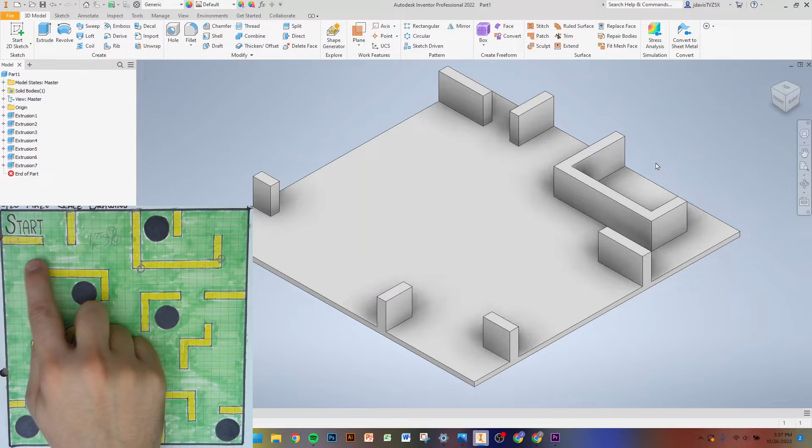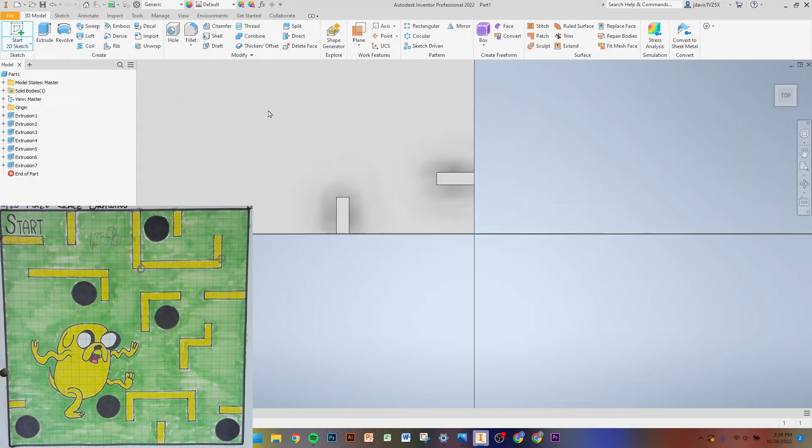Now to get these interior walls, we are not going to be snapping to anything at first. We are just going to estimate where this first box is going to go. So I know that I need to draw a rectangle that is, again, a 1/4 inch thick by 1, 2, 3, 4, 5, 6, 7, 8, 9, 10 quarters of an inch long. So I'm going to start a 2D sketch. We are going to click in our maze just like we've been doing. I'm going to go 10 quarters of an inch, which is 2.5 inches long by 0.25 inches wide.

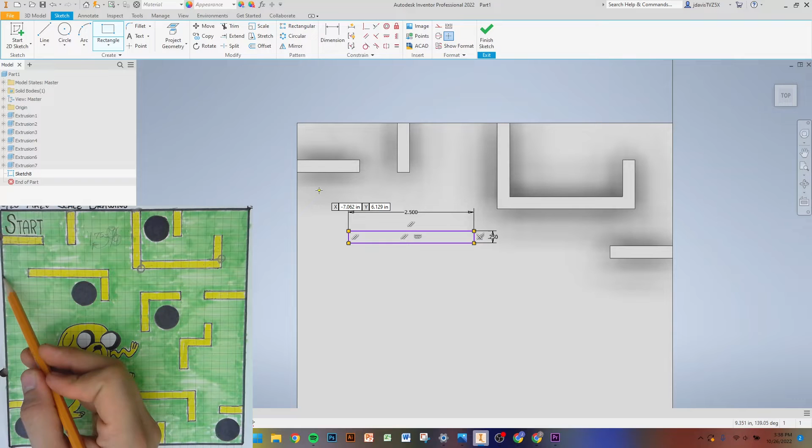Now what we need to do is position this both vertically and horizontally. Let's do this horizontal first. I can see that the edge of this wall is 1, 2, 3 quarters away from the edge of my maze. So I'm going to go dimension. I'm going to click the left side of that wall and the side of my maze. And because this is 1, 2, 3 boxes away, we know that this is 3/4 of an inch away. Now this is almost there. We know that it is in the correct spot horizontally.

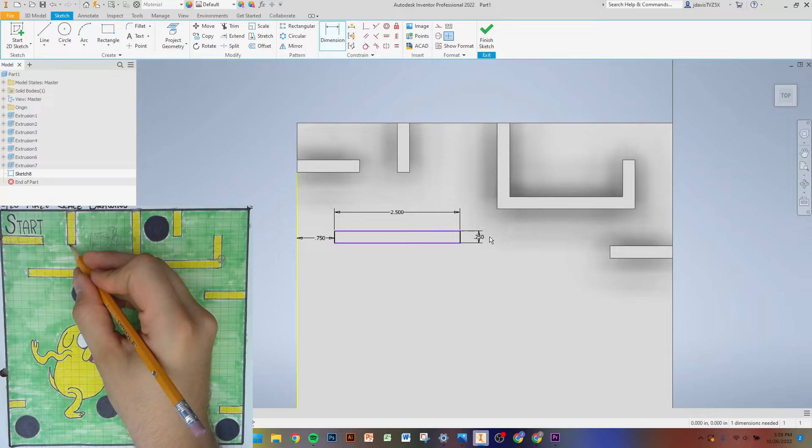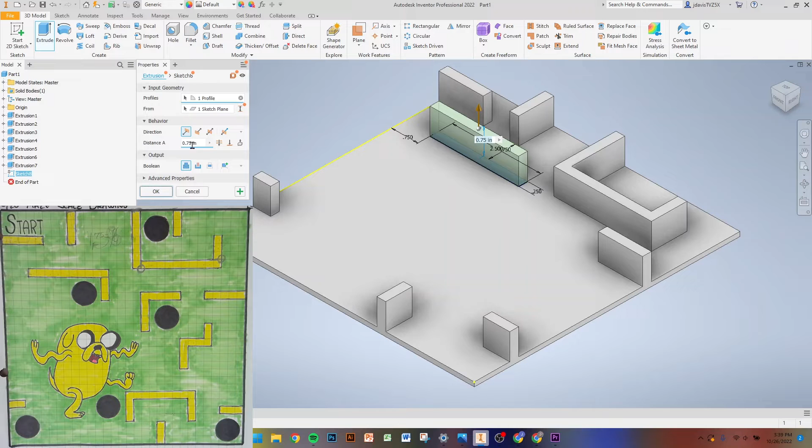Let's figure it out vertically. I'm just going to grab the closest point so I can go from right here 1, 2, 3 boxes away from the bottom of this wall. So I can dimension from this point up to this point, and again moving my mouse down to get that dimension to pop up, and this is going to be 3/4 of an inch. At this point I can just hit finish sketch, extrude, 0.75 for our height as always, and then hit OK.

The next wall, I'm going to get this little piece here, and I want to snap my rectangle to this point over here. So I'm going to go 1, 2, 3 boxes down from there. So let's start our maze. Rectangle from the corner, again wait for that to turn green, and we are going to go 0.25 thick by 0.75 inches long. Finish sketch, extrude, and that is good there.

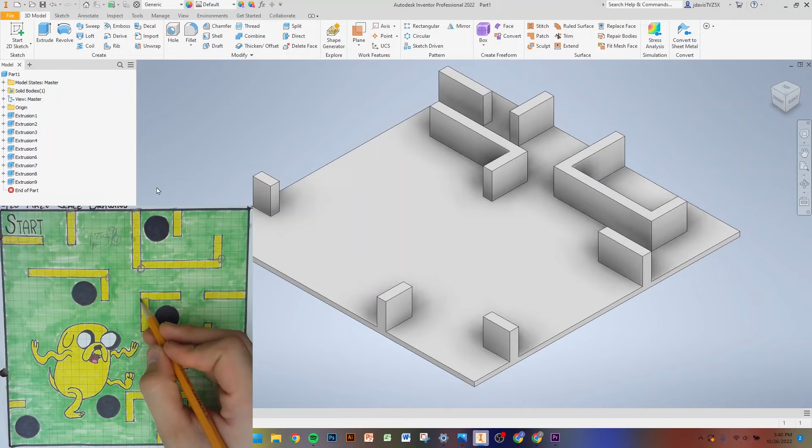Let's do one more. Let's do this one right here. Okay, again I'm just going to estimate drawing this first box here. I know that it's 1, 2, 3, 4, 5 quarters of an inch, or 1.25. So let's start a sketch. Let's draw it close to where it is, 1.25, and our thickness is 0.25.

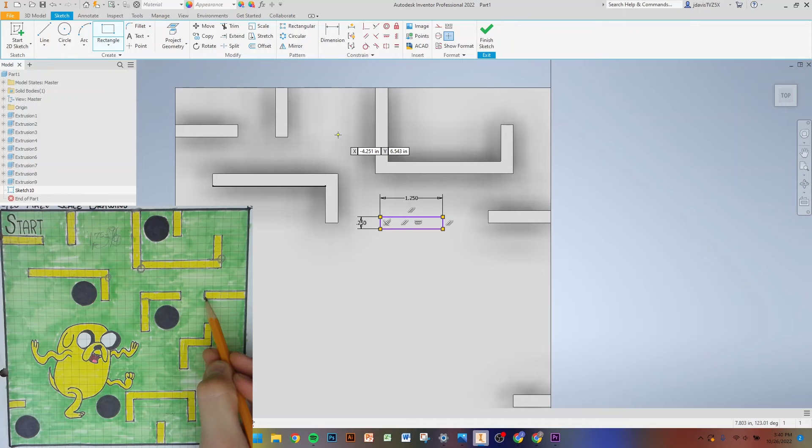Now I can see that it's really close to here, so let's get this distance. From this side of the wall to this wall is 1, 2, 3 boxes. So let's dimension from this side to this side, 0.75. And then let's dimension from here up to here. Again, that is another 0.75. So we can go here to here, 0.75. Let's finish this sketch, extrude, and OK.

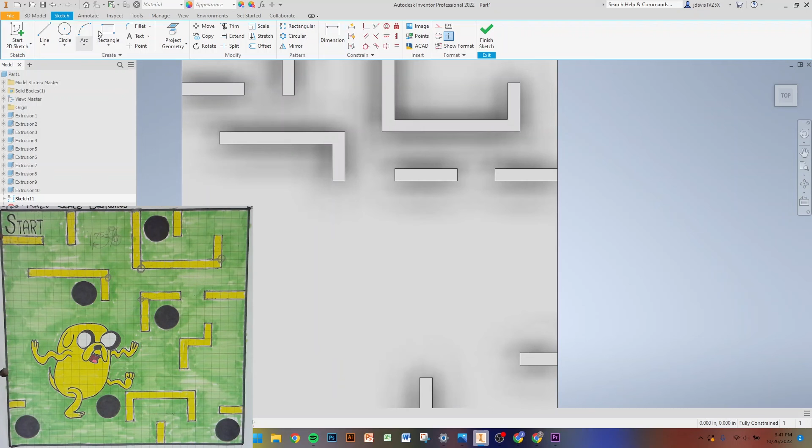Next, I'm going to start drawing this from this corner right here. Start sketch, rectangle from the green dot. This is 0.25, and I see that this is 1, 2, 3, 4 boxes long, or 1 inch. Finish sketch, extrude, and OK. Hopefully this helps.